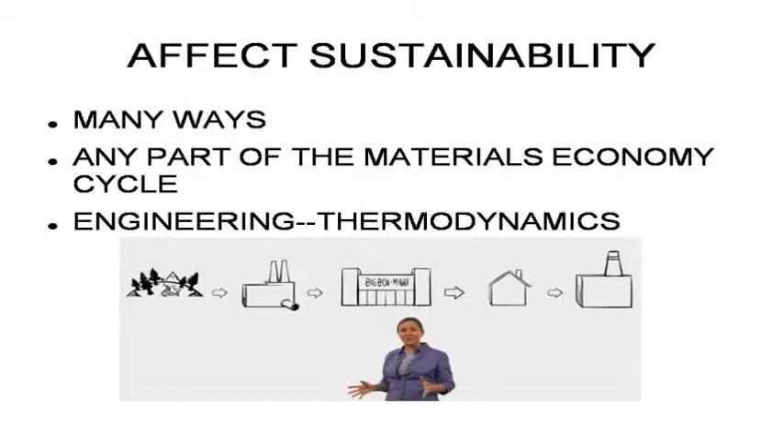But engineering is also being implemented in sustainability solutions, particularly in the area of thermodynamics. I hope to show my thermodynamics students that quantitative analysis will show the sustainability of certain alternatives.

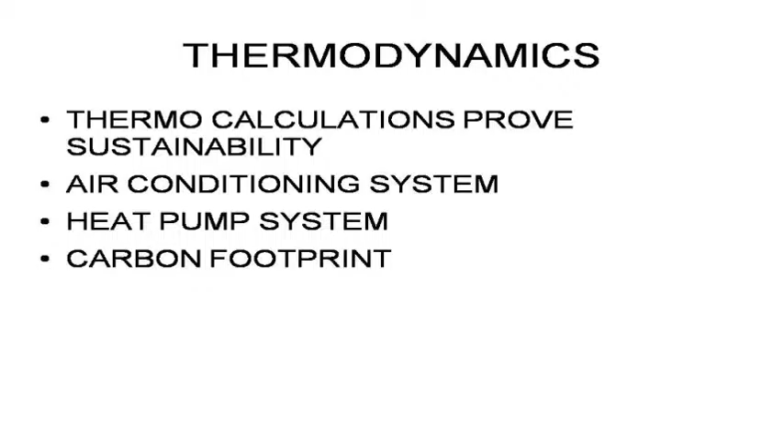Now, thermodynamics deals with studying the transfer of energy to and from pure substances that undergo phase change, for example, water or refrigerant. Two processes in particular that we analyze are 1, the air conditioning system, and 2, the heat pump system, the latter being the system to heat living space. These two systems normally use electricity to run, and as everyone knows, using electricity generates carbon footprint.

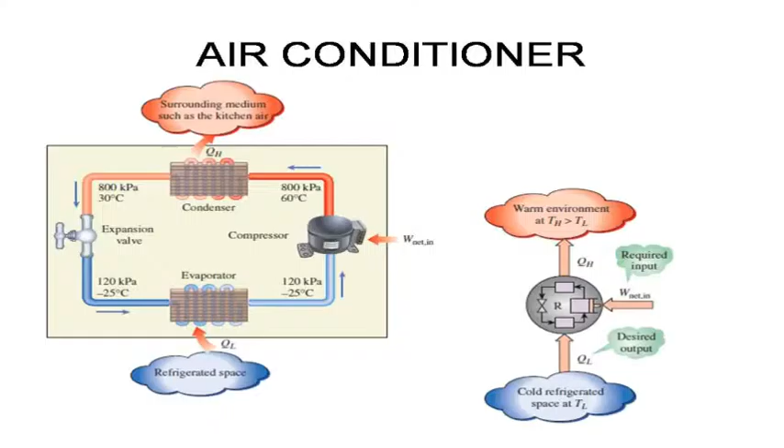An air conditioner makes a space cool by transferring energy from the space at the cost of increasing the energy of the outside air, thereby heating the outside air. Normally, you cool a house when it is hot outside, so you are working against the equilibrium state of the outside air by trying to heat it. This takes energy. A heat pump simply reverses the air conditioning process by dumping heat in the interior space, cooling

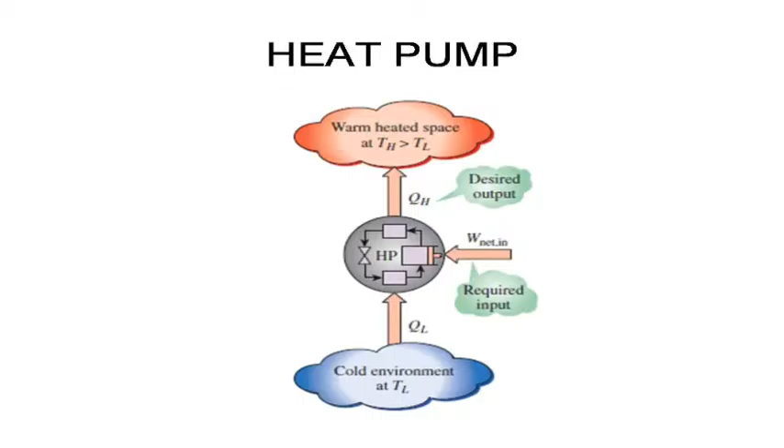the outside air. Normally, you heat a house when it is cold outside, so it takes energy to work against the natural equilibrium state of the outside air by trying to make it colder. The energy transfer of those two systems can be designed to take advantage of what is called ground source.

For an air conditioner, the heat can be dumped to something cooler than the hot air, such as a body of water. The same body of water can be used for a heat pump if the source is warmer than the cold air. An alternative heat source for a heat pump could be geothermal. Either way, using ground source takes up less electrical energy, therefore generates less carbon footprint. The R building uses ground source for heat and cooling.

Traditionally, thermo students by the end of the course will have the capability to calculate electrical energy required in kilowatt hours to operate an air conditioning system and a heat pump system. Students are given operating parameters such as desired building temperature and building energy heat loss. It will be a small additional step for them to find how to calculate carbon footprint.

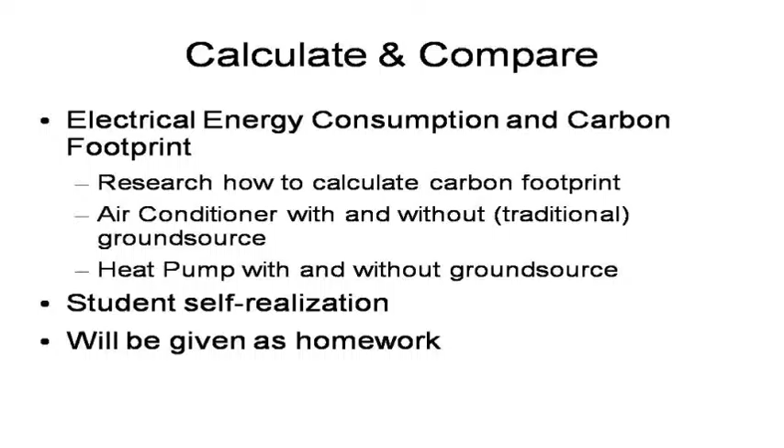They will then analyze the heat pump and air conditioner, except with those systems using ground source, provided with applicable parameters. Their calculations will clearly reveal to them that ground source systems generate less carbon footprint. Arriving at this realization on their own should leave a greater impression. Luckily, the text I use has good candidate problems that I can modify for this sustainability exercise, which the students will be doing as homework.

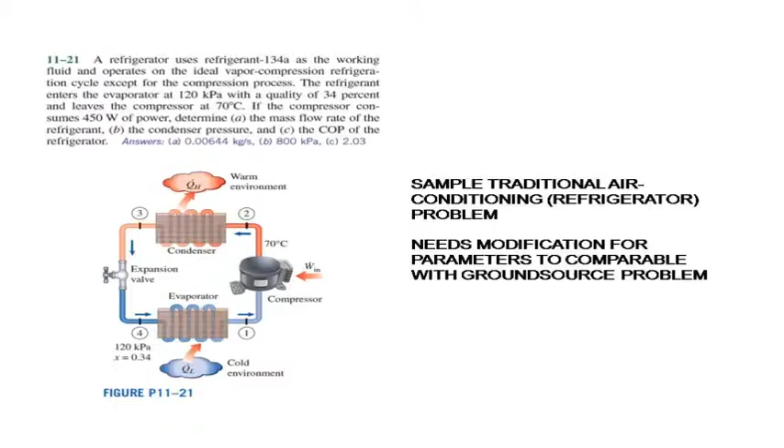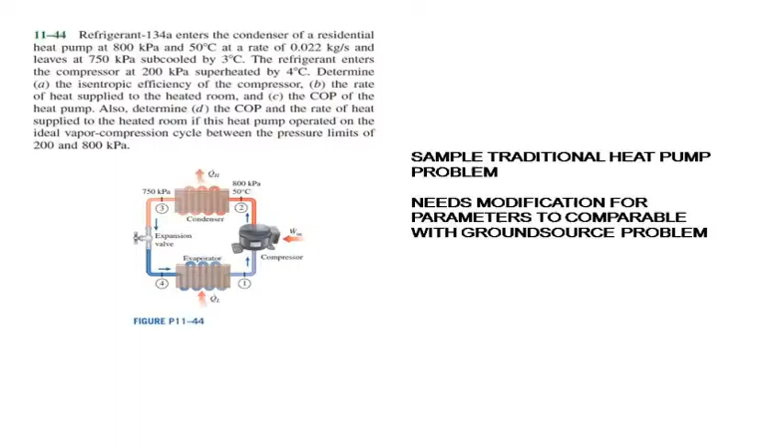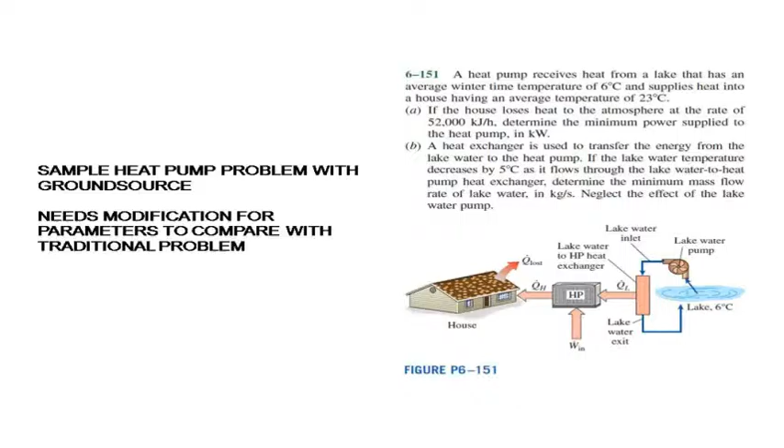The COP, or the coefficient of performance, can be used to derive energy required to run the heat pump. Here's a sample heat pump problem where ground source is used. This one is really appropriate and will be used as a basis for the traditional heat pump problem.

One option I'm entertaining is getting parameters that approximate those from the R building. If I do this, then the students would have the opportunity to have made similar engineering calculations in deciding to integrate ground source in the R building. This, combined with an optional tour of the R building, should really drive the point home.